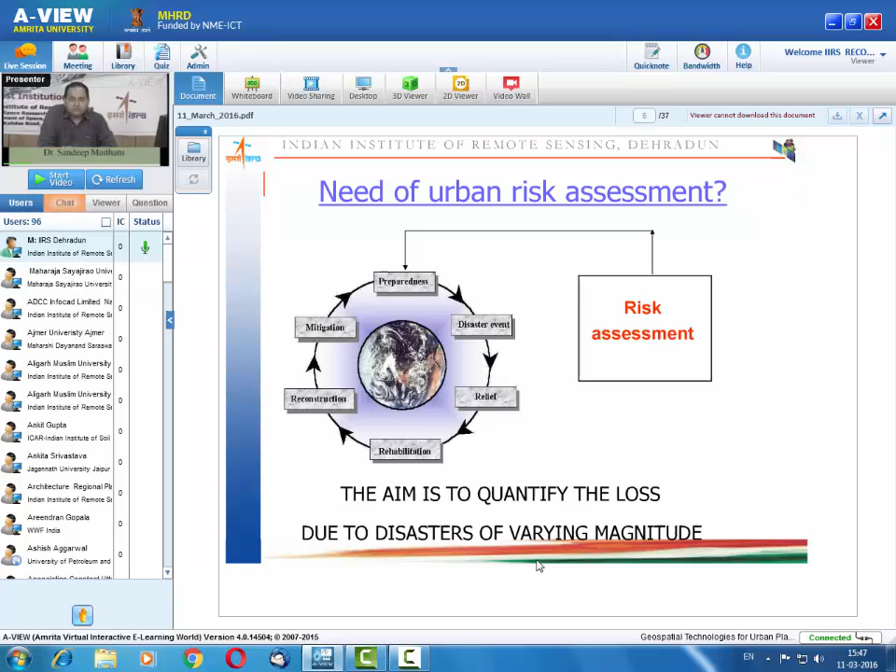The first thing is when a disaster occurs - let's talk mainly about the seismic part. Whenever a disaster occurs, it may be seismic, flooding, tsunami, or anything else - what are the elements at risk? First we have to find out. If an earthquake occurs in an area which is not inhabited, then the elements at risk may be only the flora and fauna of that area.

But the first thing you have to find out when you try to do a risk analysis, an urban risk assessment, is what are the elements at risk if a disaster of a particular strength occurs. The elements at risk are mainly the lifelines of a city - that means the infrastructure: the road network, water supply, telephone lines, sewer, drainage. These are called lifelines because they sustain a city. The second thing may be the buildings, because in any human habitation, rural or urban, people reside in buildings.

We have buildings everywhere. So the second thing at risk is buildings. The third thing is the population, the people living in the urban habitation or urban area. And the last thing is the environment of the area. So before you do a risk assessment, you have to find out what are the elements at risk if a disaster occurs - basically the lifelines of a city, the infrastructure.

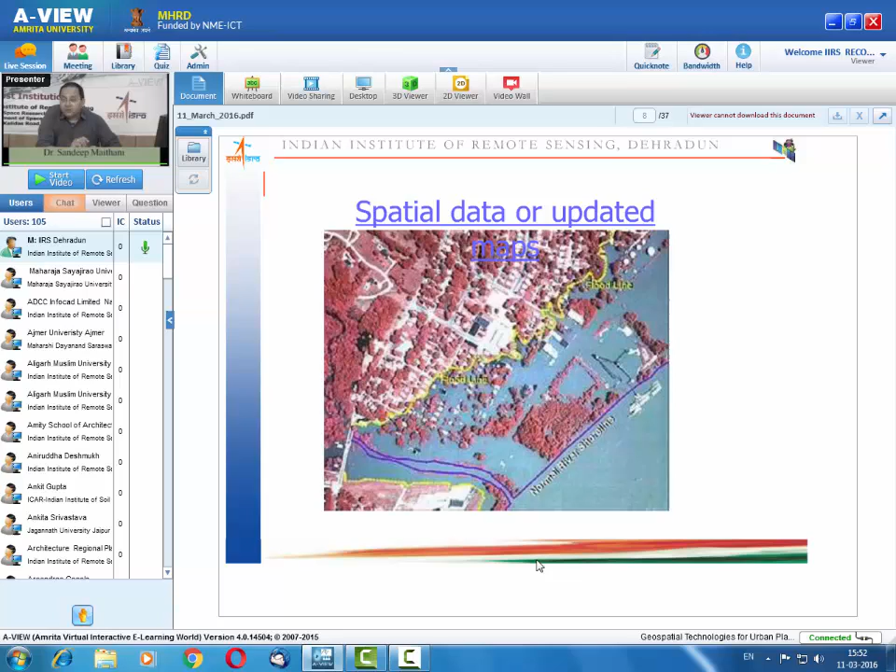But our conventional method of record keeping is mostly in a non-spatial format. It's not that you cannot extract data from it - you can - but in case of a disaster we need data very fast, accurate data that is fast, and we have to update that data. So extracting data from this kind of storage system and updating it is very time consuming.

So the first thing is we should have accurate and updated data of a particular area. Remote sensing serves as a spatial data provider - it can provide accurate, updated data at various temporal scales, spatial scales, and different spectral resolutions and wavelengths, which helps in identifying features.

Maps can be generated very fast using remote sensing data, while GIS is more of a spatial data handler. Remote sensing provides you data and GIS helps you in handling that data - storing it, querying it, displaying the outputs, and distributing files to people who need them. So broadly, this is the role that remote sensing and GIS play in a disaster management exercise.

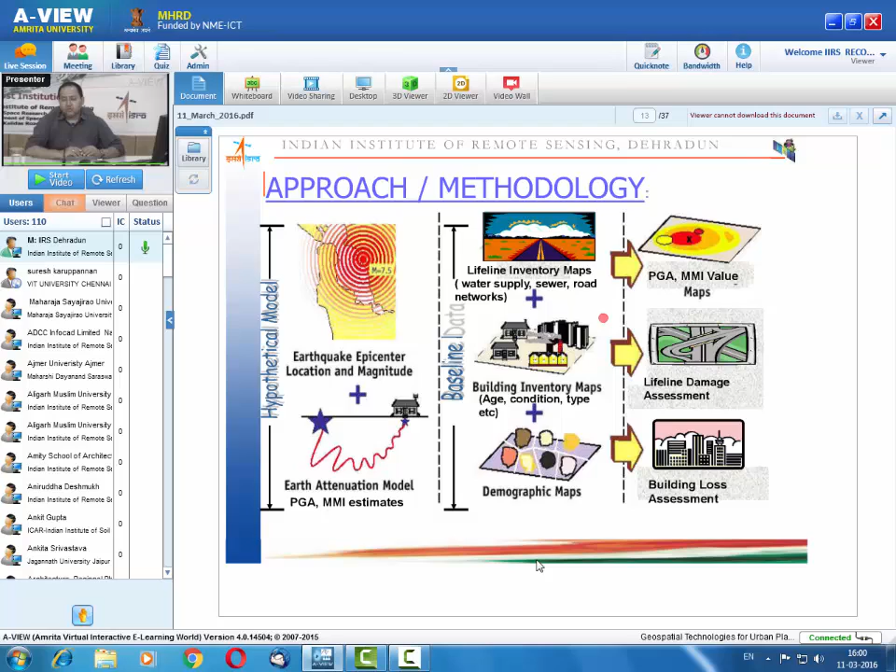Then, in a GIS environment, using this hypothetical earthquake and the generated baseline data, you try to estimate the damage to different kinds of buildings, the damage to different kinds of infrastructure - the lifelines of a city - and also try to estimate the casualties or other impacts to human life.

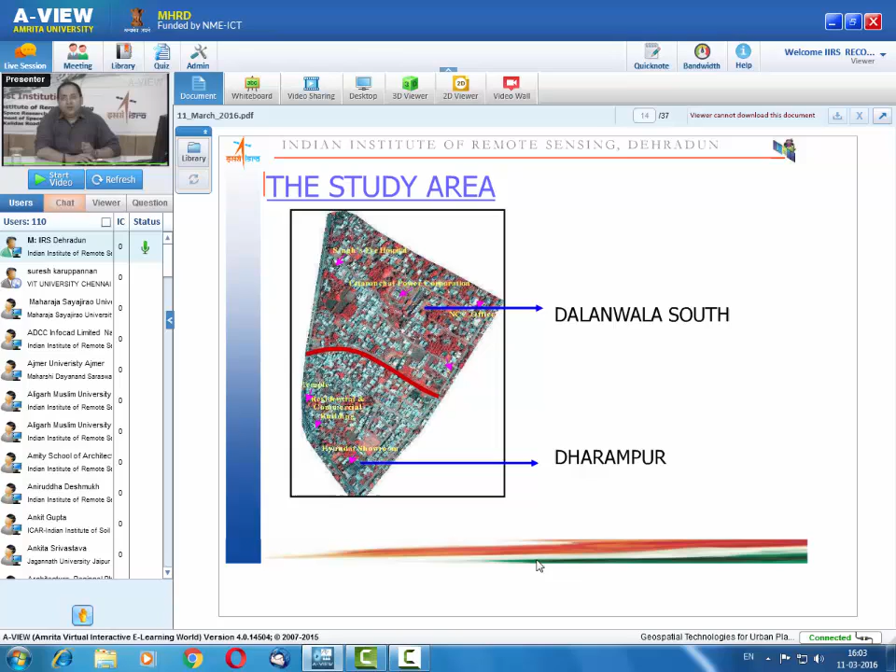Second, when we went for ground survey, we digitized the boundary of each building along with the plot, and we also collected secondary information from the ground, like building type. There are two types of buildings in the study area: one is called a framed structure, the other is called a load bearing structure.

In a framed structure we have pillars or columns which take the load, and the rest of the walls are used for partition walls. While in load bearing structures we don't have columns or pillars, it is the walls which basically take the whole load. For an earthquake prone area, it is advisable to follow a framed structure, because during a seismic activity or earthquake, the entire structure vibrates in a monolithic manner, and we have less chances of collapse.

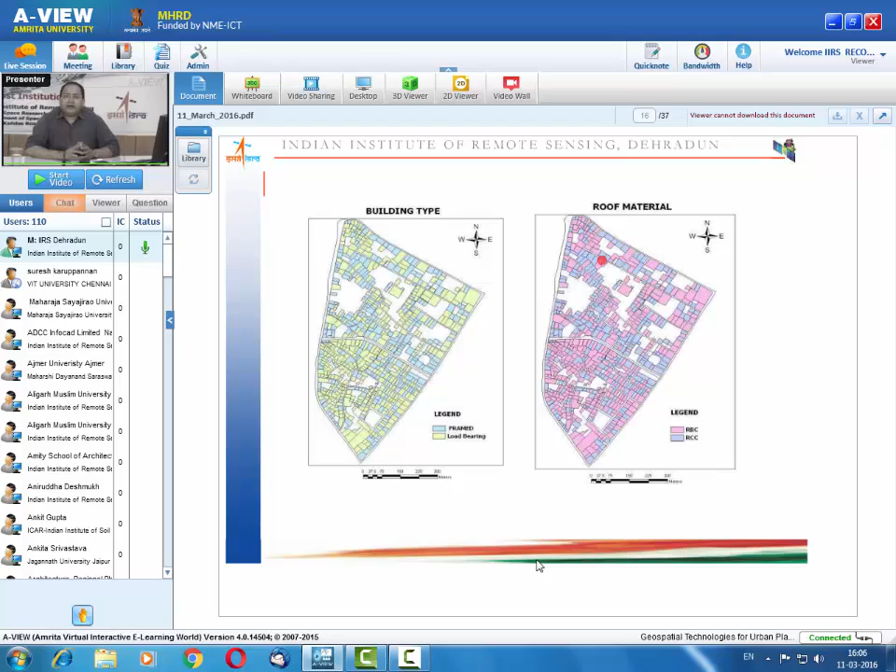As we discussed earlier, this data is available in map format, raster format, and tabular format also. In a register you can keep it in table format, but you cannot analyze the data. If you see the same data in a map format, you can analyze it.

Why do buildings of a particular type tend to cluster together, or are they located in a particular region? Is there a phenomena, why things have taken place in a particular manner? That is the advantage of GIS. It helps you in better understanding of a particular phenomena because you see things in a spatial format. You can correlate things in a better manner.

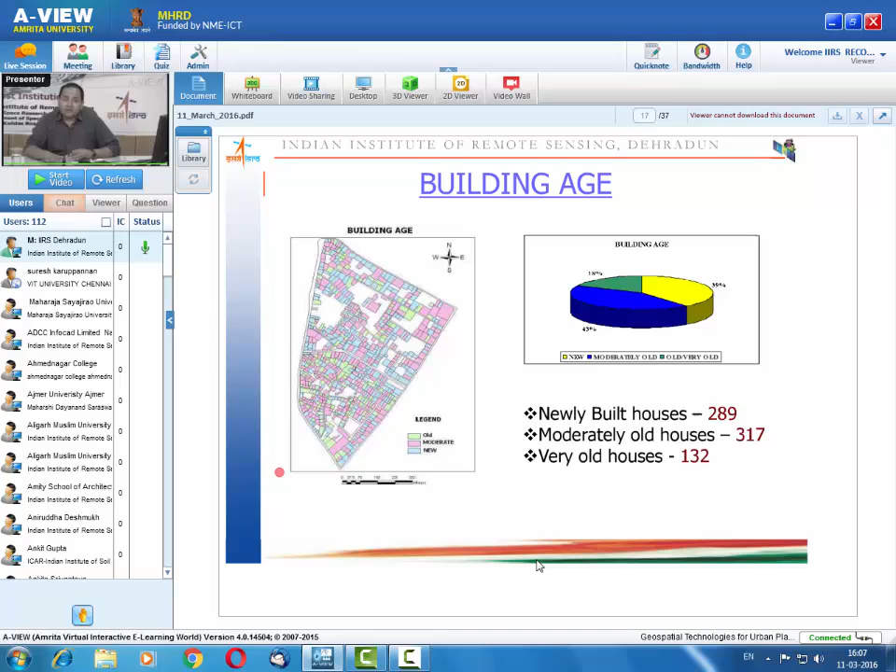One more thing we have noticed is the proximity between the buildings. Normally some buildings have got a pattern where they are just adjacent to each other with no gap. In case of a seismic activity, when the buildings shake, they tend to collide with each other, and that is also a reason for damage to the building.

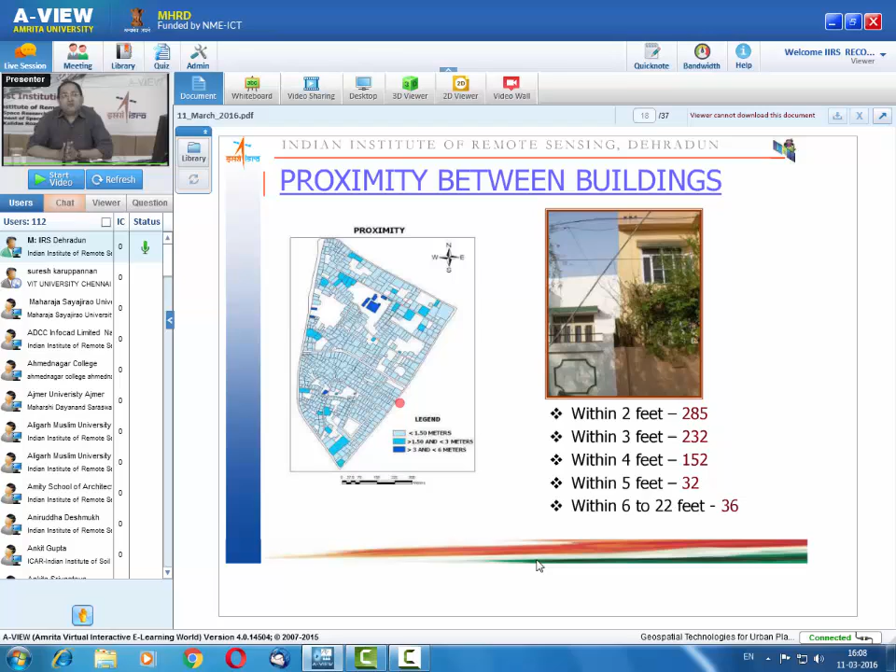So we collected data on how many buildings are situated within 2 feet, 3 feet, 4 feet, and tried to classify them into different categories. What we found out is that most of the buildings have a distance of less than, you can see there, 1.5 meters. So if they are too close, sometimes tall buildings tend to collide with each other when they shake. So proximity between buildings is also an important factor.

The next thing is that most of the buildings tend to have a ground floor only. Most buildings in the study area are ground floor, while those located on roads on the outer skirts tend to be ground plus first floor. Buildings which are inside are mainly used for residential purpose and tend to be more single story, with ground floor only.

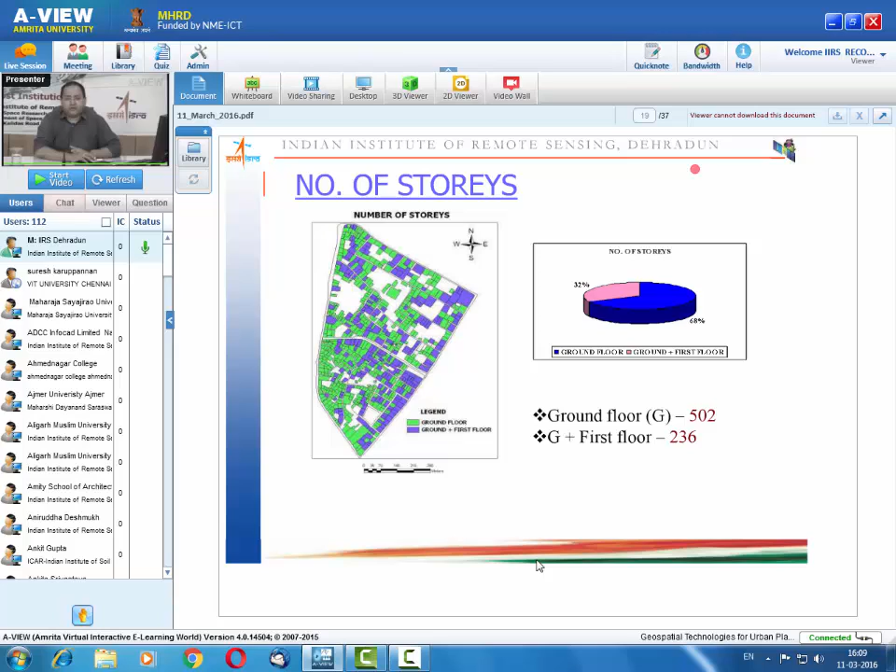Now, using remote sensing imagery, we have generated a footprint map. Then we have collected data from the ground about the activity going on, made a land use map, and collected other attribute data also, like the number of stories, the age of the building, the proximity between the buildings, whether it's load bearing, and whether it's an RCC structure. We discussed a number of these activities.

Now we have got something called the damage probability matrix. In short, we call it DPM, as written in the slides. What DPM tells us is, if a building has an attribute like, suppose it is a load bearing building, the roof is RBC, and the building is asymmetric, meaning it's not a rectangular or square shape but tends to have a shape which is not symmetric, and maintenance doesn't matter, and it is an old building, then we classify it as a C1 building.

On the basis of the attributes we have collected on the ground, we have classified the buildings into different types: A, A1, B, B1, C1, C2, C3, D1, D2, D3 - a number of classes. Then we say, if the intensity of the earthquake is 8, then building type A1 has a 0.6, or 60%, chance of damage.

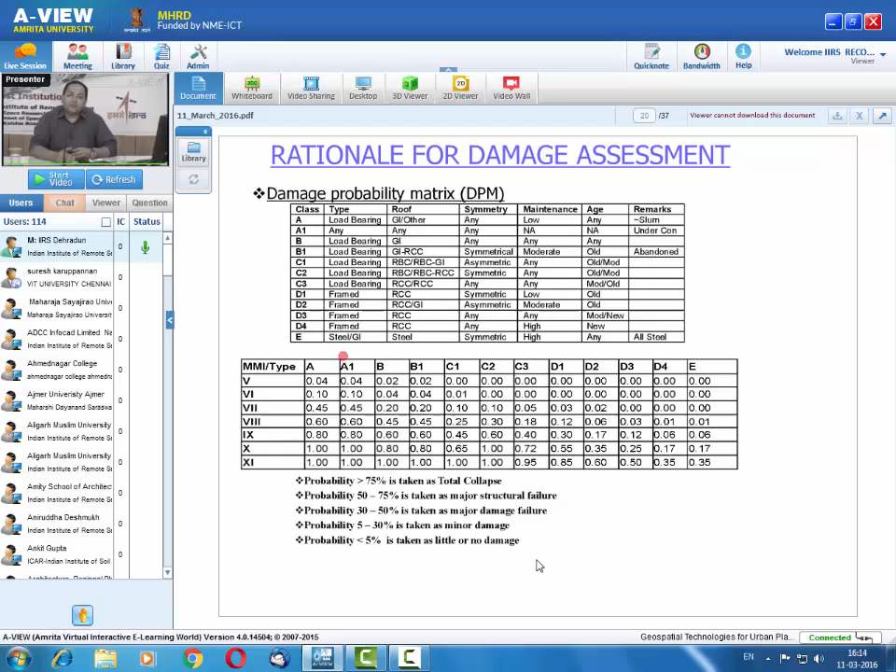So you see, if an earthquake of intensity 6 strikes, there will be little or no damage in our study area. But if an earthquake of intensity 7 strikes the city, some buildings will have little damage, but quite a few will have minor damage. If an earthquake of intensity 8 occurs, the area with minor damage building has slowly gone up.

In case of earthquake intensity 9, the damage rate will start increasing. In case of intensity 10, some buildings will start collapsing also, and the damage rate to other buildings will start. And at intensity 11, the buildings which are collapsing will increase dramatically.

Now what we have to correlate is, if a building collapses, what kind of land use or activity is going on there—this data we already collected, shown earlier. If a building collapses, what kind of activity is going on in that building? If it is a building housing a school, hospital, or any other crowded place, then our casualty rates will be high.

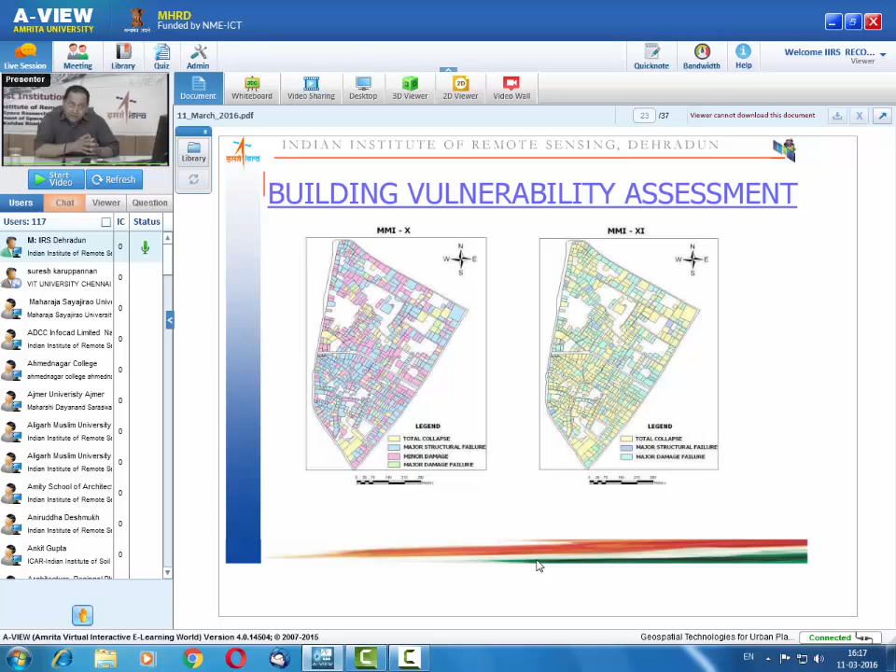This is what I showed you previously in a tabular format, and this is in a map format. Earlier I was saying this gives you the figure, but if this same thing is expressed in a map, it helps you better understand the phenomena. You can know how buildings which are collapsing are near to each other, whether they are clustered in a particular area, or spread randomly. That is the advantage of using a GIS, or doing things in a spatial format.

Secondly, we can also generate different queries. One thing is you do assessment, but sometimes you can query a GIS database too. You can say, I want to find buildings which are residential, in close proximity of each other, asymmetrical in shape, with very poor maintenance, moderately old, load-bearing, RBC roof. Please show me the location of those buildings, and we will find there are 463 such houses, and they tend to be clustered in this area, and in this area.

Now, when you see things in a map format, you know that buildings which are very vulnerable tend to cluster together. You can see they are clustering together. That reason you can then find out why they are clustering. Or if you do retrofitting, you know exactly that you have to work in this area only, where most of the houses satisfying this criteria are located.

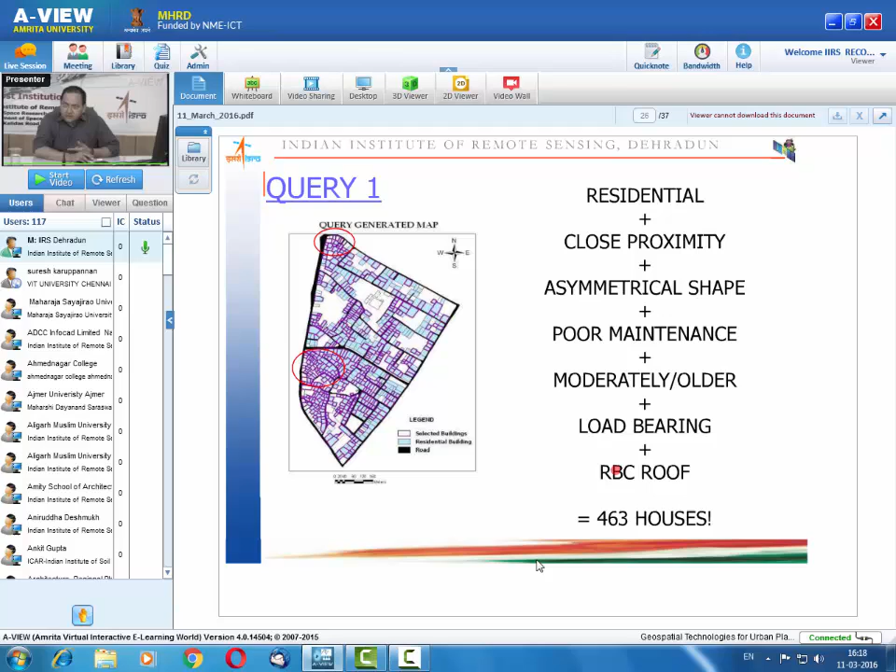Then you can again generate a query like: buildings which are residential, situated at more than 4 feet from each other, symmetrical in shape, well maintained, newly built, framed structure. Where are those? You will find these buildings are not clustered; in fact they are spread out across the area. While buildings satisfying our earlier criteria tend to cluster in a particular part of the study area. So you know if an earthquake occurs, there will be more loss of property in this area, and relatively less in other areas. You know the phenomena, how it is spread in a particular area, how the losses will be spread. This you can do by using a GIS.

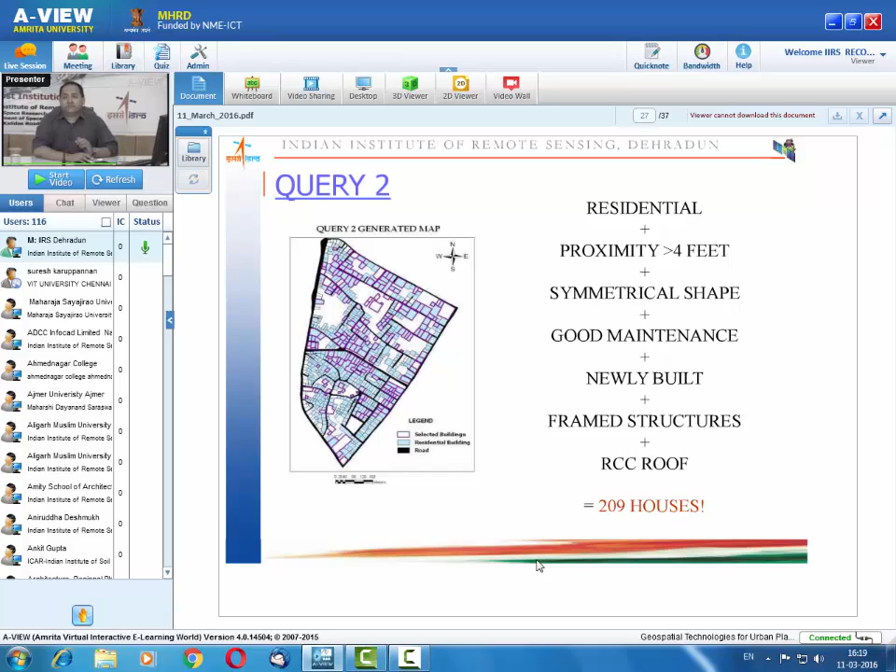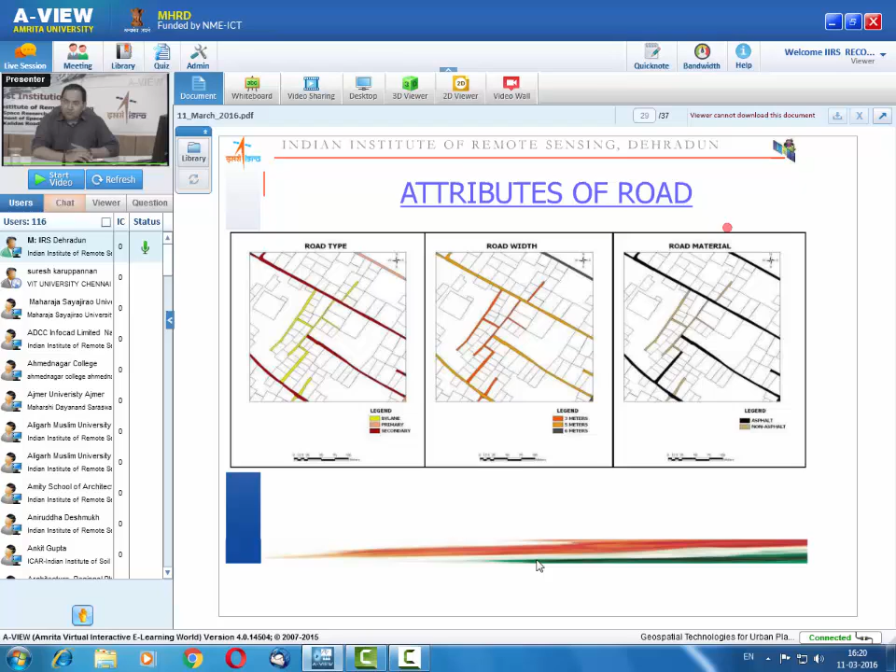Secondly, what happens when an earthquake occurs? The road gets blocked. Earlier we tried to quantify how buildings with different kinds of losses are situated in the study area. Now we are trying to estimate which road has a high chance of blockage if an earthquake occurs. First, using remote sensing data, we found out the road type, the road width—3 meter, 5 meter, or maybe more—and the road material, whether it is asphalt or non-asphalt.

Then, for a 3 meter road we generated a buffer on both sides of the road. Similarly, for a 5 meter road we generated a buffer on both sides, and for a 9 meter and a 6 meter road we also generated buffers. Within this buffer, if buildings tend to have a high collapse rate and the road width is very small, there is a high chance that this road may get blocked because of the debris. And if the road is blocked, you cannot carry out any evacuation, rescue, or relief operation.

So, if in this buffer around a narrow road the buildings tend to have only minor damage, then we know there is a high probability that this road will not be blocked, and we can still carry out rescue and relief operations in that particular area.

So what we have done is, we have created buffers on both sides of the roads, and in this buffer, the buildings which are situated, we have estimated what type of losses they have. If all buildings in the buffer collapse and the road is only 3 meters wide, that means this road has a high probability of blockage. But if it's a wide road, say 6 meters, and some buildings are collapsing in the buffer, there's still a chance it will not be blocked, and we can carry out rescue and relief operations using that road.

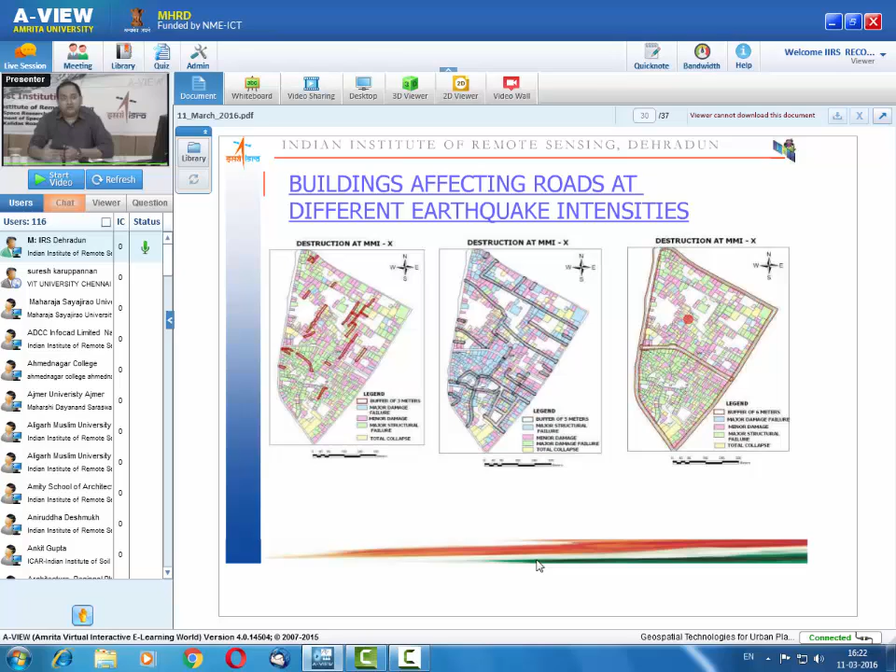Earlier we had made this for intensity 10, now we've made it for another scenario, and you can again generate scenarios. As I discussed earlier, this all provides a rational basis on which you can take decisions regarding your city planning or the evacuation plans you develop for your city.

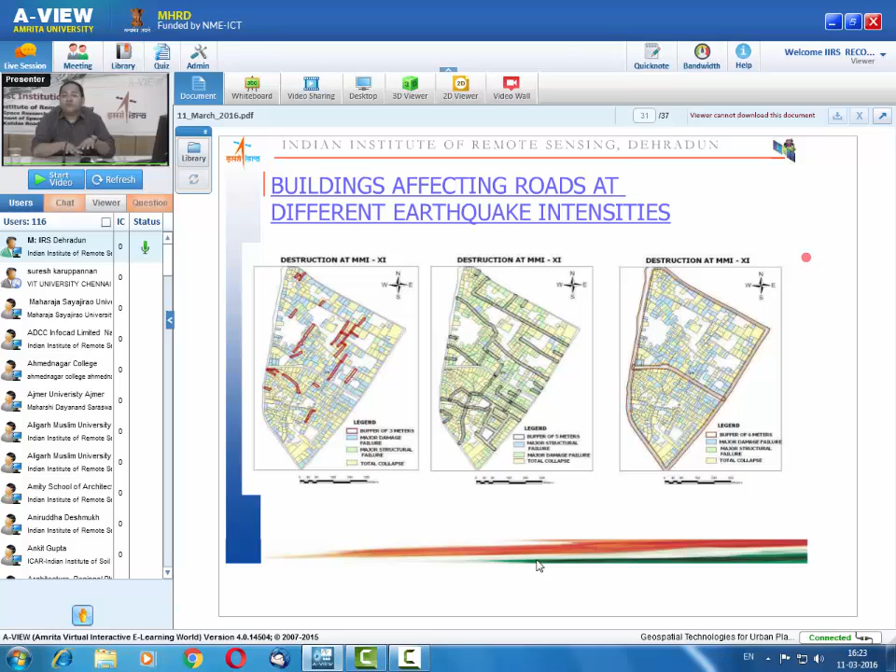What I showed you in map format, we have also created in a tabular format. This is just an idea where we have draped it on top of the satellite imagery. If this is the roads, what you see in brown is that this road has a high probability of blockage, this road will be blocked, but these roads will still be open. These buildings will collapse and this will be the area affected by them.

Now what we are trying to show is which road has a very high chance of blockage at a particular earthquake intensity. If you have a hospital situated here, then at the time of the earthquake, that hospital will not be functional because you cannot reach it by road. Neither can you bring people in, nor take out the wounded. The solution is either to create another road or to shift the hospital.

If you have medical ambulances located here, even then these ambulances won't be able to get out of the area. They can't move because the road is blocked.

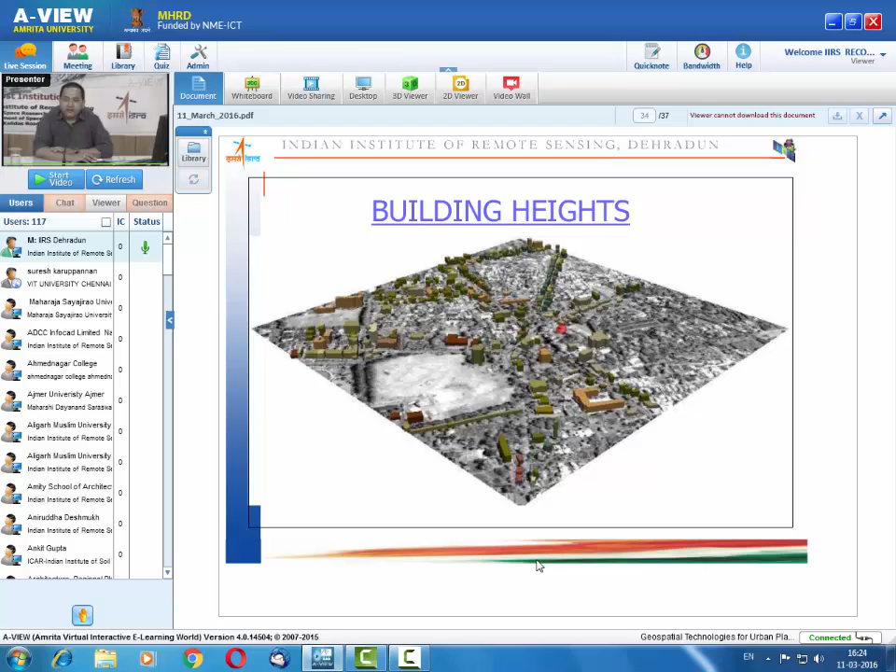Again, we try to show the same results in a 3D format. This shows the building height and gives you an idea that this road is going to be blocked. This shows the same area - this road, because it's a narrow road with tall, high buildings on top. In fact, this is a major commercial area of Dehradun, so in case of seismic activity, this road has a high chance of blockage.

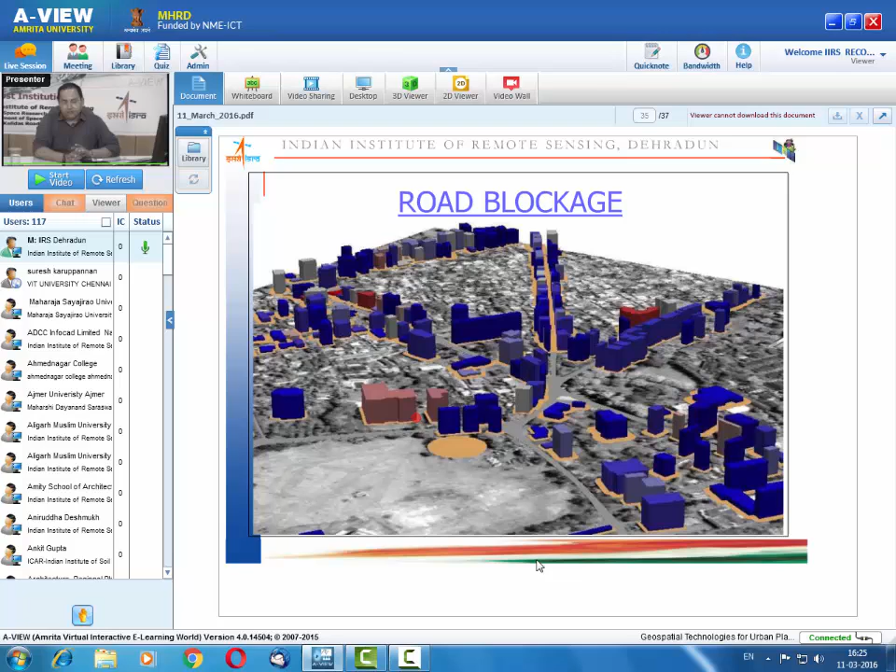Since it is also a commercial area, a lot of people may get trapped here. But this road will still be open and we can use it for rescue and relief operations.

So this is where we have attempted to do some study regarding the application of GIS and remote sensing in the field of urban risk assessment, and these maps can be used for various planning exercises also.